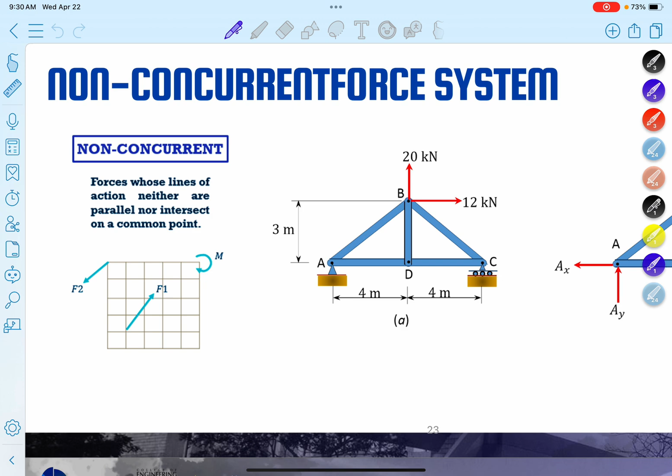Okay, tingnan natin. For non-concurrent force system, the forces whose lines of action are neither parallel nor intersect. Ibig sabihin, hindi sila mag-meet at a single common point or hindi rin sila parallel with each other. Okay? Ibig sabihin, combination siya ng maraming force system at once. Pwedeng ganon. So, for example, eto. Teka lang. Ito pala.

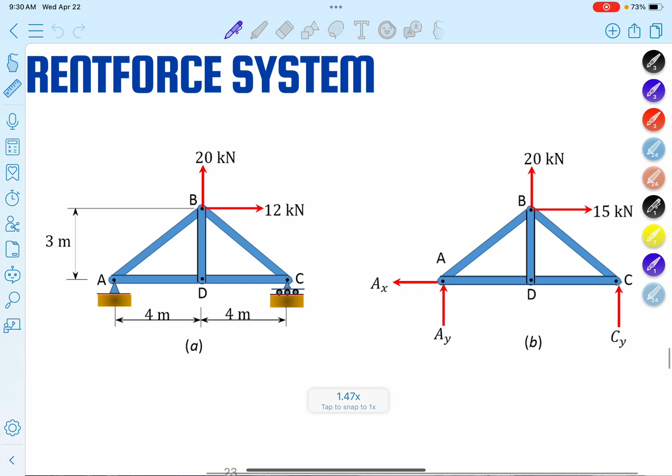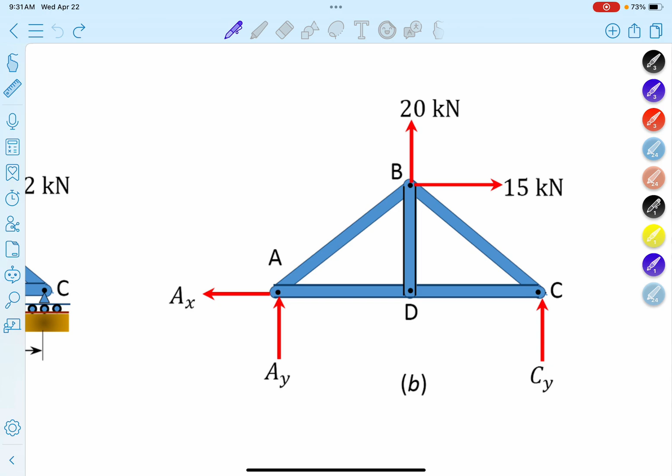For example, hindi pa kasi tayo kukuha ng reactions, but ginamit natin free body diagram na to. Etong mga forces natin na to is hindi sila concurrent, although concurrent sila at a single point. Sa mga joints na yan, doon sila concurrent. But in general, sa buong system, hindi sila concurrent, hindi rin sila parallel kasi ito 15 tsaka itong parallel ba yan? Hindi. Pwedeng parallel to and dito, but hindi siya parallel with all the components of the forces involved. So technically, yun lang yung concept ng non-concurrent.

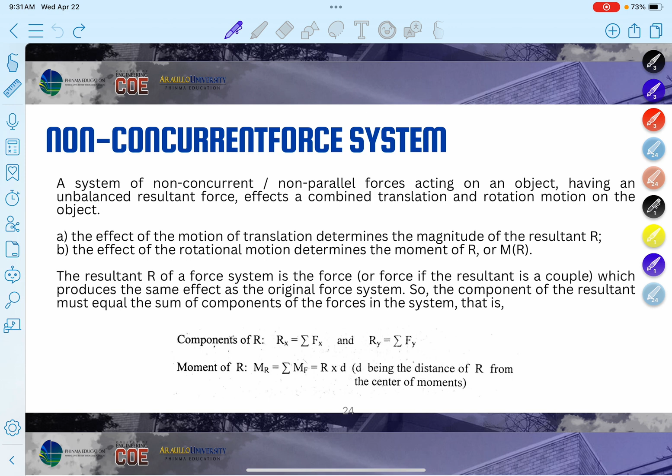For non-concurrent force system, dito na natin magagamit yung analytical solution ng ating force systems. But take note guys na magagamit pa rin natin dito yung concept ng parallel and even yung concurrent forces natin. So, for non-concurrent force system, non-parallel forces acting on an object having an unbalanced resultant force effects a combined translation and rotation on the object. The effect of the motion of translation determines the magnitude of the resultant. The effect of the rotational motion determines the moment R or MR.

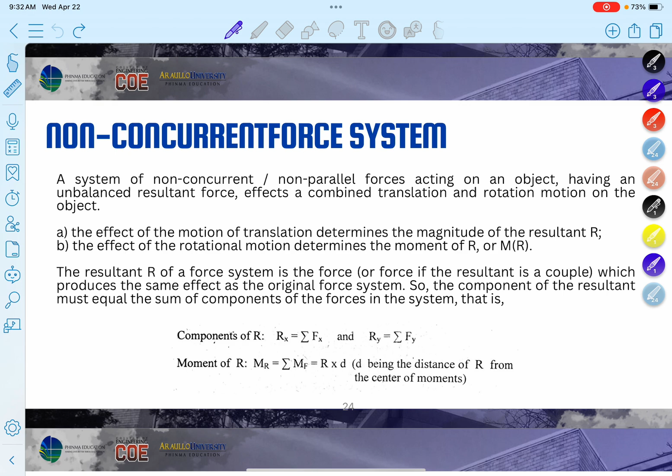But in this case, hindi ko muna isasama yung concept ng moment dito para ma-emphasize natin siya during the discussion of moments and couples para hindi rin kayo masyadong malito. Mag-focus muna tayo sa resultant. So, for the components of R, guys, same lang sa kanina: Rx is equal to summation of forces along the x, and then Ry is the summation of forces along the y. And again, yung moment, hindi ko muna siya i-elaborate dito, para lang magka-idea kayo. For non-concurrent force system, focus tayo dito muna.

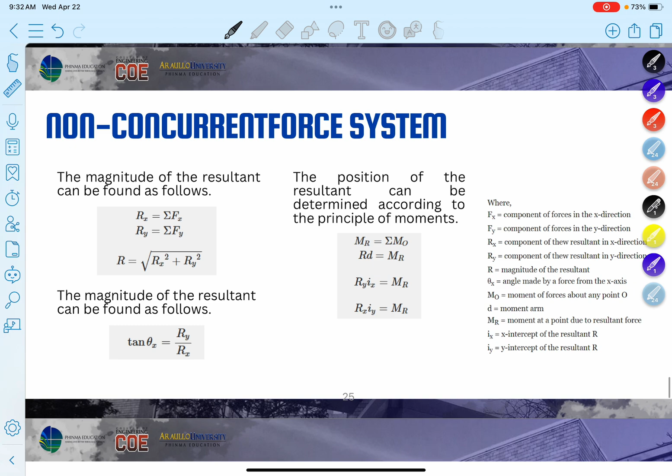For the magnitude of the resultant, Rx is equal to, like kanina, ganoon lang din naman yung approach niya. Nagkataon lang na hindi concurrent yung force system natin, kaya nagkakaroon ng moment. Sa concurrent force system kasi natin guys, alalahanin nyo na walang moment dun kasi nagpa-pass through yung forces natin sa point of concurrency. But again, hindi ko pa i-elaborate ngayon, kalimutan nyo muna. Rx is equal to summation of forces Fx along the x, and then Ry is summation of forces along the y-axis.

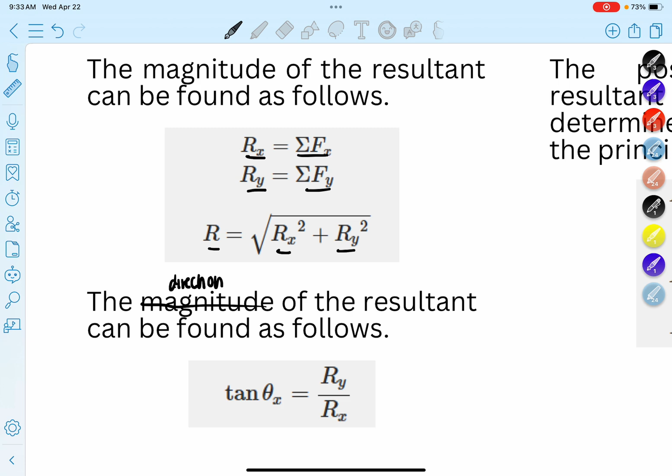And then for the resultant, we have R equals the square root of Rx squared plus Ry squared. And then the direction of the resultant can be found as follows. Kung kukuha naman kayo ng angle, angle theta is equal to the arctangent ng Ry over Rx.

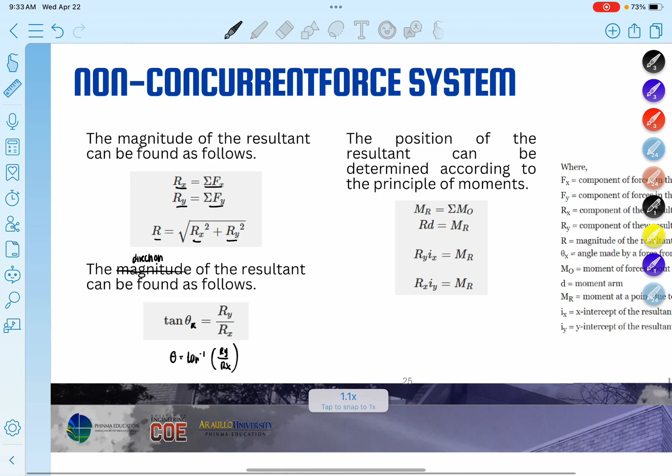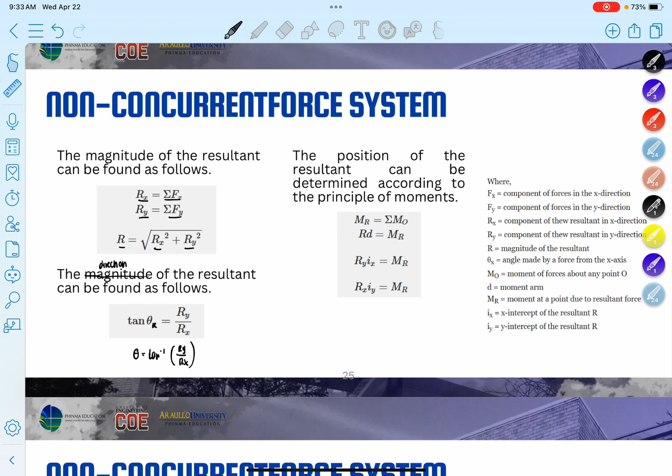So, simple lang. Ganyan lang naman guys yung ating non-concurrent force system. So basically, iikot lang tayo lagi sa summation of forces along the x is equal to Rx and the summation of forces along the y is Ry. So, yun lang ulit yung concept natin for non-concurrent force system. Okay?